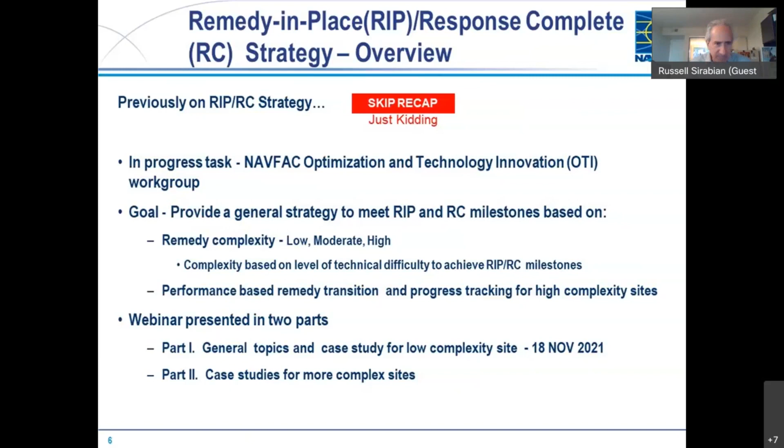So here's an outline of part 1 that was presented last month. So we discussed Navy programmatic goals along with the RIP-RC strategies for low, medium, and high complexity sites. There really was an emphasis on the high complexity sites, as those are the ones that really present the greatest challenge in meeting our metrics.

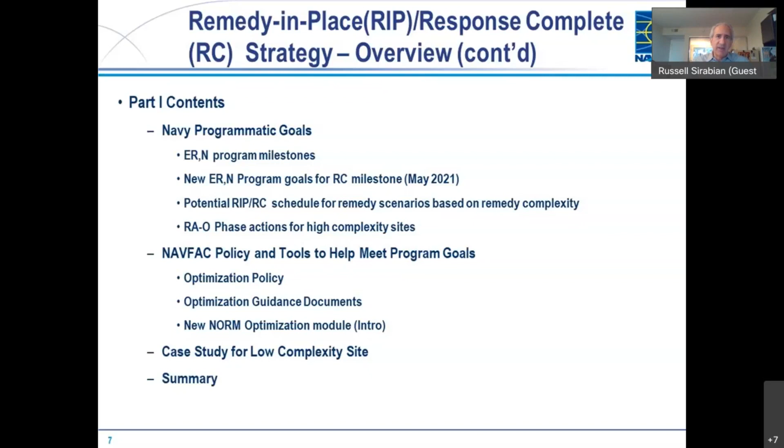We then discussed Navy optimization policy and guidance documents, and introduced the Navy's optimization tracking tool that allows us to better understand the benefits of performing optimization at a programmatic level. Part 1 also included a case study where the RC milestone was achieved for low complexity sites.

Now note that PFAS sites are not included in these goals because there are just so many variables with respect to PFAS sites that just make it impossible to predict where it will be in the next 10 years. So if we exclude the PFAS sites, the Navy has reached the response complete milestone for 86% of the sites, and that's based on the end of fiscal year 21.

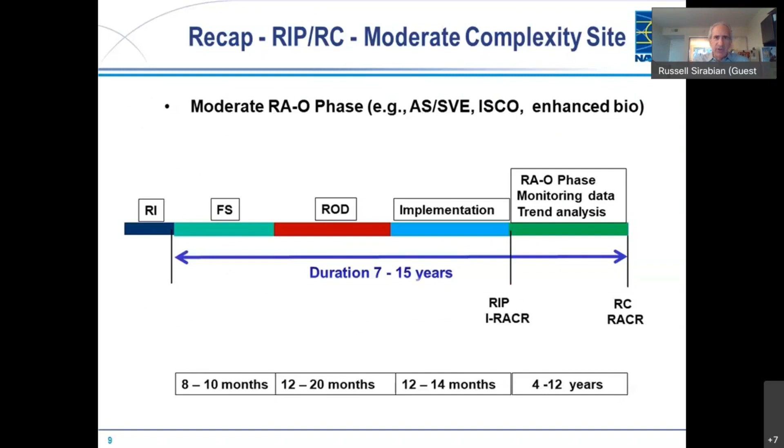So in part one, we presented several figures similar to the one that you see here, showing typical milestones for sites with different levels of complexity. This one is for a moderate complexity site. And note that these timelines on all of these figures are based on the experience of the OTI workgroup members. And they're not meant to be goals or requirements, but really meant to serve as a planning tool.

Now, this timeline is for a high complexity site, and it includes the additional step of the RC transition, where the transition is from an active remedy to a passive remedy. And the RC transition is important for highly complex groundwater sites where it could take decades to reach the cleanup goals. And for these sites, performance criteria can be established for the active remedy, which defines the point at which protectiveness can be maintained with only a passive remedy in place.

So some examples of passive remedies include monitored natural attenuation, natural source zone depletion, or permeable reactive barriers. And achieving response complete transition results in lower cost, as well as having a protective remedy that's sustainable and resilient. So the concept of this RC transition will be illustrated in the following case studies. And with that, I'll turn it over to Pam Chang now to discuss the case study at Camp Pendleton.

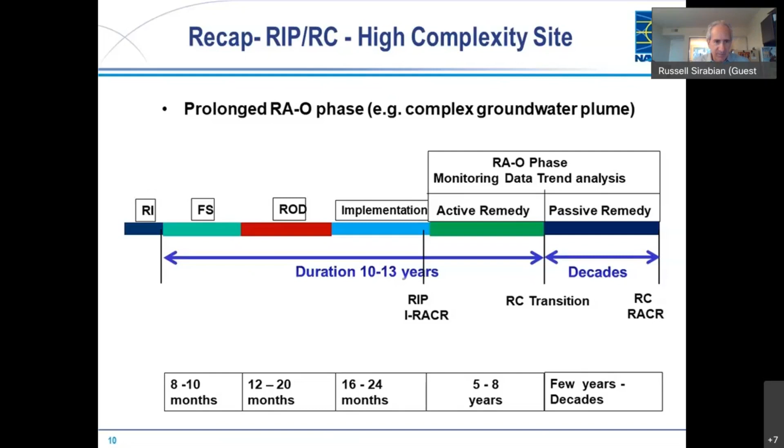Great, thank you, Russ. All right, I'll be talking about a UST site at Marine Corps Base Camp Pendleton. Here's a quick overview of what I'll be talking about. I'll give you a quick site description, talk about the remedial action objectives, the remedy, the construction of the remedy, summary of the remedial action operations, any monitoring data trends we may see, response complete milestones, significant challenges, optimization strategies, and end with current status.

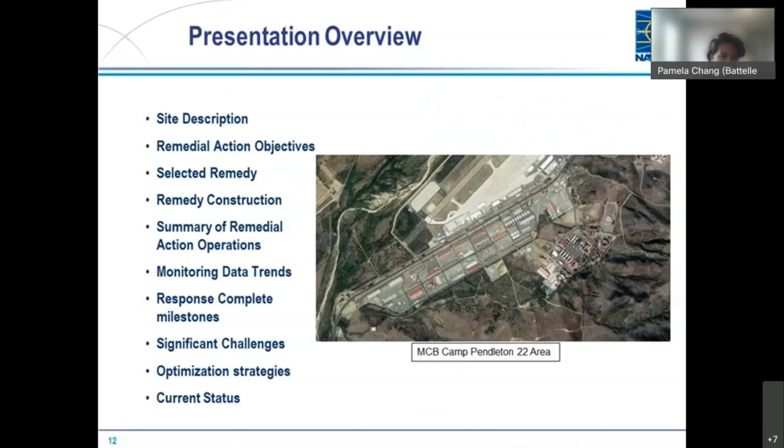All right, so Marine Corps Base Camp Pendleton is located in San Diego, California. It is bordered on the west by the Pacific Ocean and occupies 125,000 acres of land. And any given day, there's over 60,000 people on the base. And with that many people, there tends to be a lot of vehicles, and vehicles need refueling. And Camp Pendleton has 5 gasoline stations on the base. We're going to be talking about the 22 area gas station site. And the 22 area gas station area is very, very busy. It has multiple uses. It has a lot of industrial activity that supports the various activities on the installation.

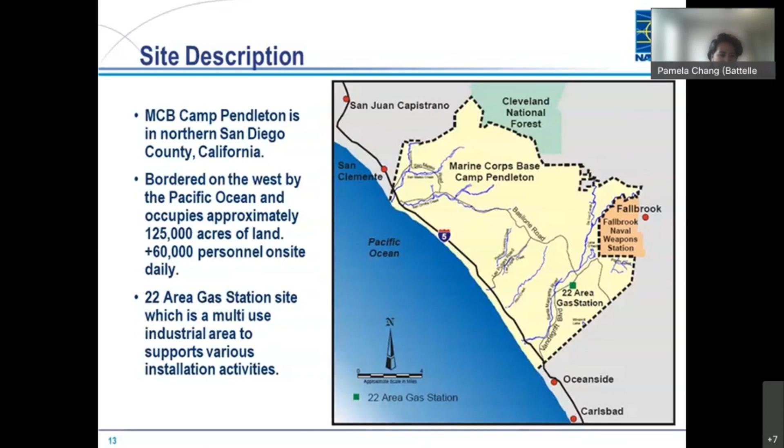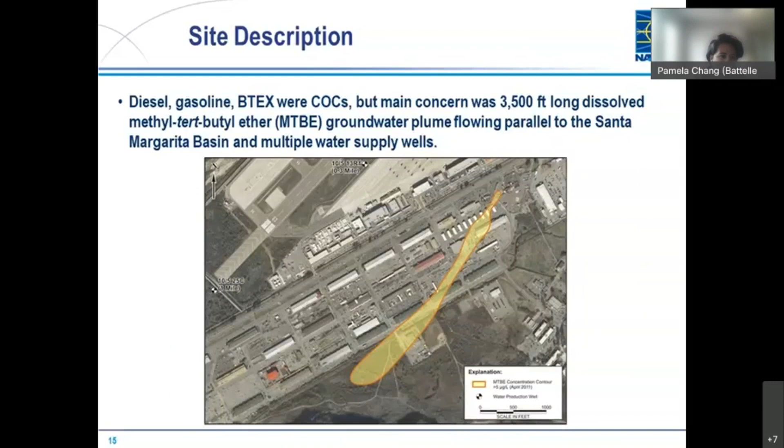So the main contaminants of concern were diesel, gasoline, and BTEX. But by the time the CAP was written in 2001, the main concern really pivoted to the MTBE that was in the groundwater. It was a 3,500 foot long plume. It paralleled the Santa Margarita Basin, which had many water supply wells to the north. The RAOs were developed based on the State Water Resources Control Board using their MCLs for drinking water. Here are the MCLs for BTEX, and as you can see, for MTBE, 5 micrograms per liter can be pretty challenging to meet as a project action level.

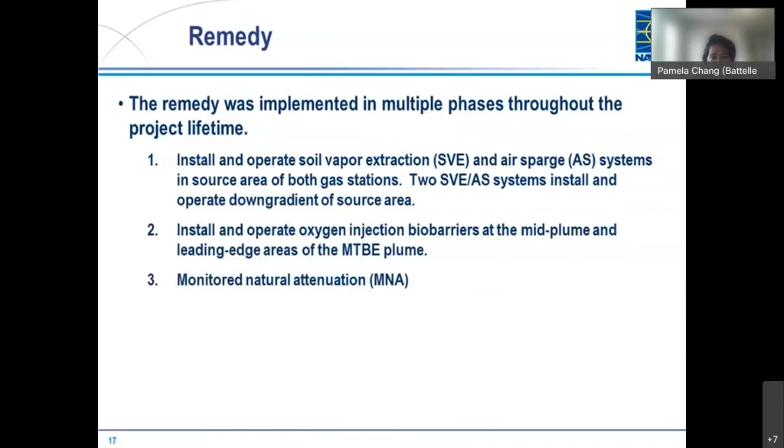The remedy was implemented in multiple phases. It first started off with interim remedial action, which was the soil vapor extraction and air sparge systems for both gas stations in the source area. And then there were 2 systems installed downgradient of the gas station. So those are 4 systems total. And then those were transitioned over to oxygen injection biobarriers at the mid-plume and leading edge areas, followed by monitored natural attenuation.

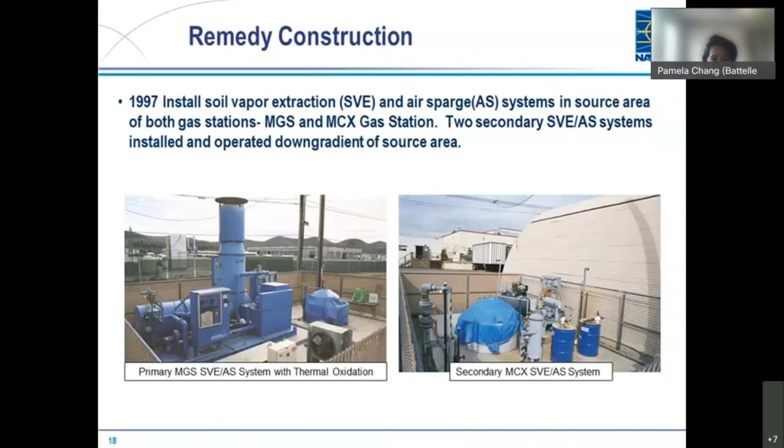The Water Board did concur with discontinuing the active remediation and transition to MNA. And for about 15 years, the Navy collected groundwater samples with TPH diesel and BTEX concentrations reducing to less than reporting limits. And for that reason, the Navy started engaging with the agencies to get no further action. But there was a little bit of a hiccup in the sense that there was some soil contamination in the source area that was known.

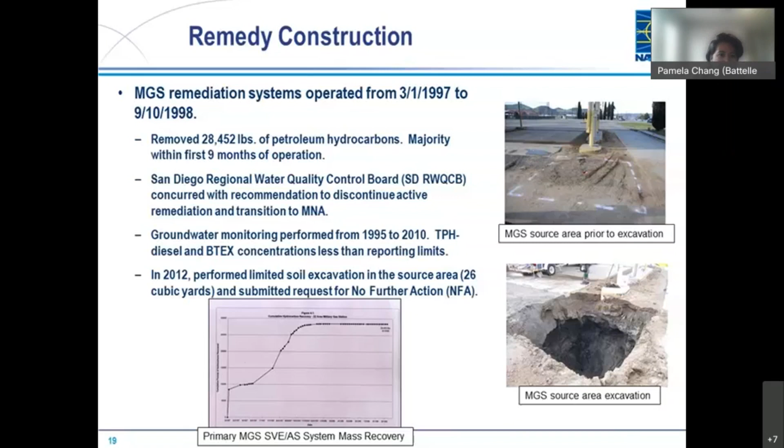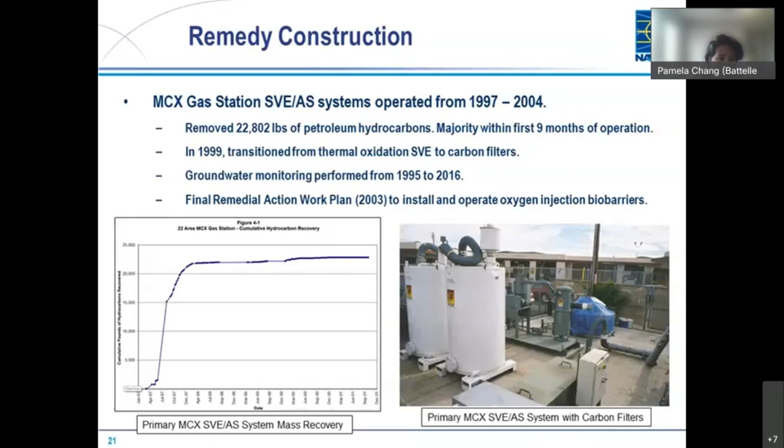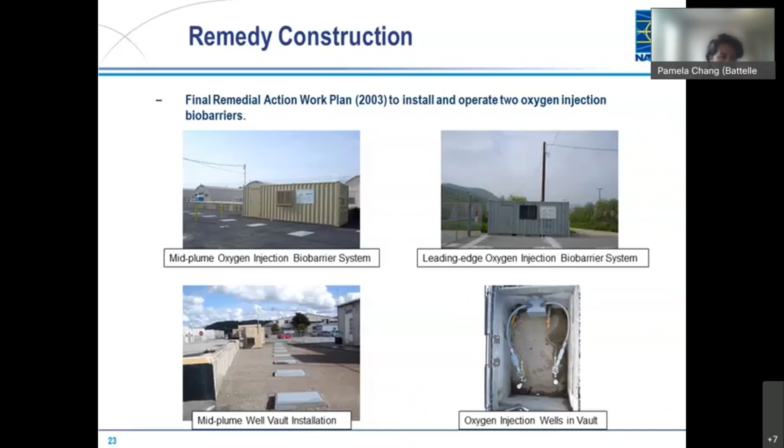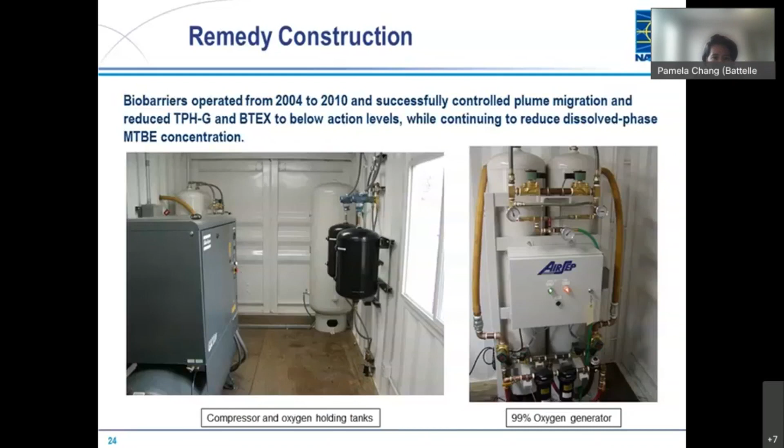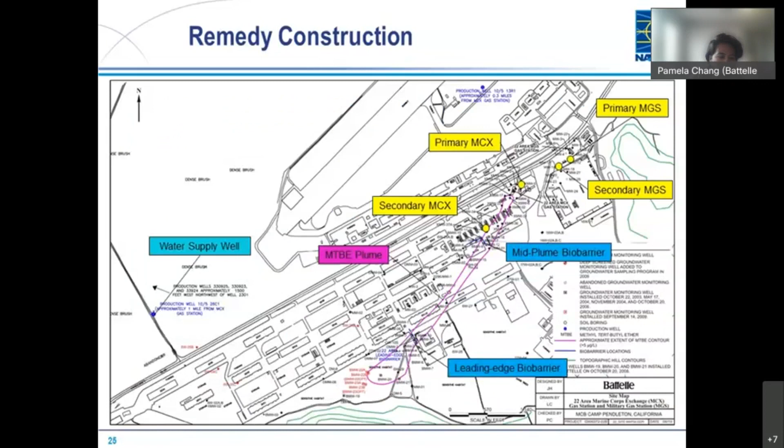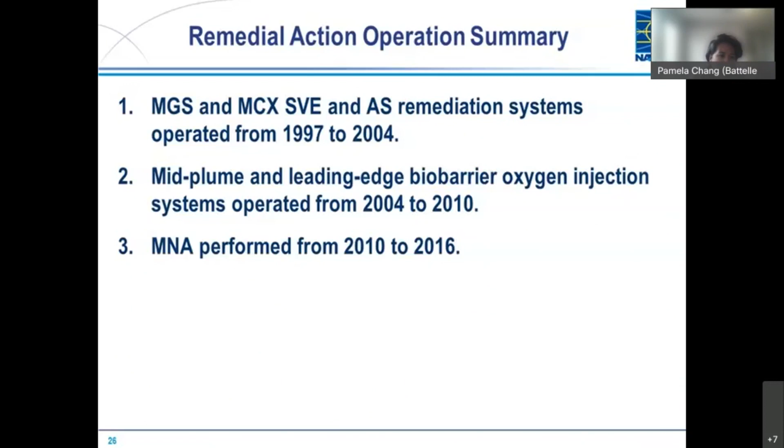Significant challenges. So with, I think, many sites, negotiating the cleanup levels with the regulatory agency is always very challenging. This was made more difficult with regulator personnel changes. I could count about 7 changes that I experienced. And starting in 2012, the Water Board started implementing a low threat UST case closure policy. It was actually a really great policy because it made a consistent method of determining if a site is eligible for closure. However, our MTBE plume did not meet that criteria. So for that reason, the Navy had to find additional lines of evidence to negotiate closure.

Another significant challenge, hotspots. I think this is common as well for most sites. For the MGS, I showed you the excavation that occurred because of the soil hotspot. For the MCX, we had a hotspot of groundwater for MTBE. And so for a couple years, we brought in a portable sparge system, connected it to 3 wells, sparged for 2 years, and were successful in reducing that hotspot from 820 to 18 micrograms per liter.

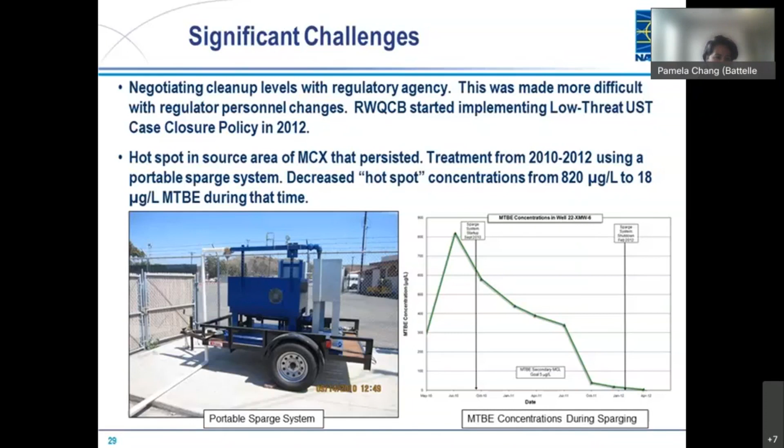Remedy optimization strategies. So the main one was in 2007, the Navy performed a third-party optimization, and the recommendations that came out of it were increasing the leading edge oxygen injection barrier system cycling, so just putting more oxygen in the ground, and shutting down the mid-plume oxygen injection biobarrier system. Around that area, the concentrations had decreased to almost action levels. And so it made sense to try and shut down the system, and that was achieved in 2010.

Optimize the groundwater monitoring program, which was essentially reducing the number and frequency of groundwater wells sampled using regression trend analysis and decision tree diagrams, and then updating the conceptual site model. The regulatory agency indicated there were some data gaps, and so we used cone penetrometer testing to identify those data gaps.

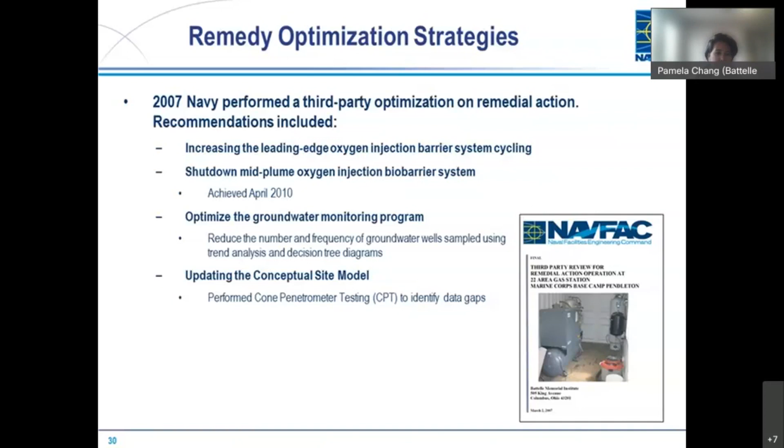So I'll talk a little bit more about the additional lines of evidence used to achieve response complete. I mentioned that the mid-plume was shut down, and a lot of that had to do with doing a sustainability analysis using SiteWise, which is a Navy Excel program available on the website. Essentially it tries to quantify the energy requirements of the system or the site and determine the environmental impact of that site. In this metric, we're going to use the carbon footprint, CO2. The end result being running the mid-plume biobarrier for 1 year is equivalent to driving 16 SUVs all year. The agencies were very receptive to this, and for that reason, agreed to shutting down the system.

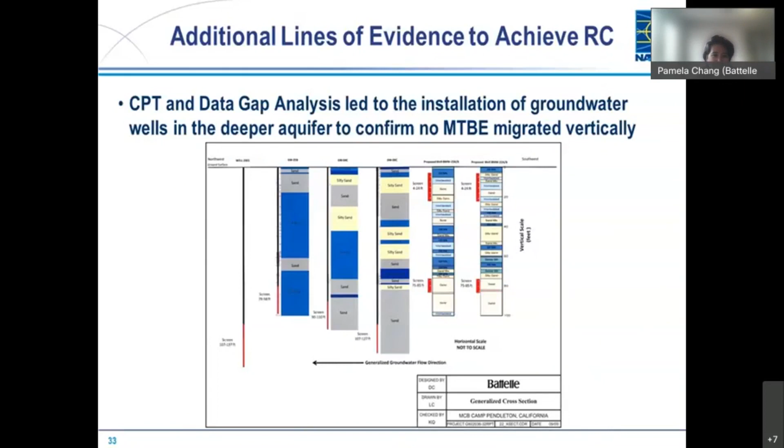Another thing we did was the cone penetrometer testing I mentioned. It's a data gap analysis tool that we used to eventually install groundwater wells in the deeper aquifer. We sampled those wells to confirm that no MTBE was down there and that none had migrated vertically. This was a great concern for the agencies, and we were able to complete that data gap. Another thing we do, which I think agencies often ask, is a correlation between the MTBE and groundwater elevation. We did that with statistical analysis, and the end result was that we did not find a correlation between groundwater elevation and MTBE. That was very encouraging and helpful towards achieving response complete.

And then lastly, we did a capture zone analysis using MODFLOW, a commonly used groundwater modeling tool in our industry. We did a 20-year backward particle tracking analysis using various pumping scenarios, like the current pumping rates and increased pumping rates, even to the point where we're drawing down the aquifer, to see if the MTBE would be pulled into the production well that supplies all 60,000 people on base. The end result was there actually was not a draw of the MTBE into the capture zone of the production wells. I think that was probably one of the key linchpins in achieving response complete for this site.

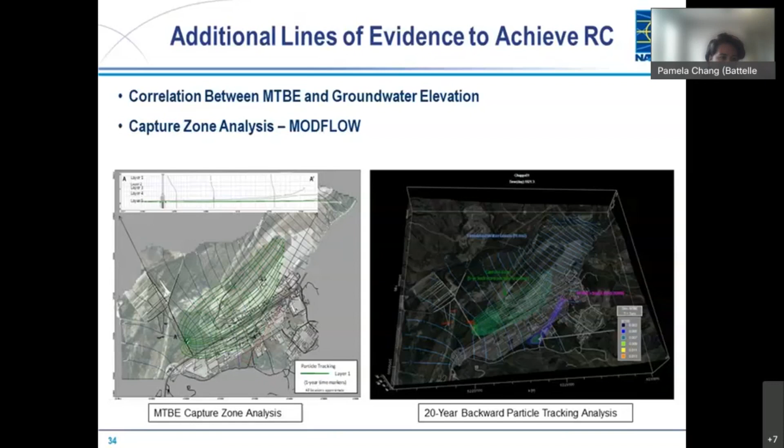So the current status, the Navy achieved the ultimate goal of returning this area to Marine Corps Base Camp Pendleton so they can complete their mission critical activities. And we achieved no further action. However, the Water Board did note that if there are any future land use changes, they may require reevaluation. That simply means that if there's any land use changes or construction being performed on site and they encounter contamination, the environmental security people of Camp Pendleton would notify the Water Board to determine if the site needs to be evaluated. And that is my last slide.

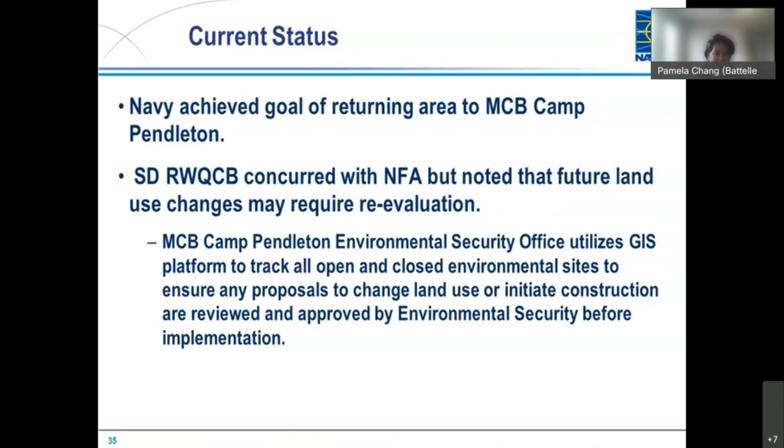All right, so I will turn this over to Mike Singletary to talk about his case study. All right, thanks, Pam. So for the second case study, I'm going to talk about a site at former McGregor, specifically Area M, and the path, including a lot of optimization work, that this site has been on to achieve response complete.

So McGregor was a large facility, roughly 9,700 acres, located in a fairly rural part of Texas. It was a government-owned, contractor-operated facility that was used to manufacture bomb and rocket motors. As part of that process, whenever they would clean those rocket motors out, they would use a hog-out type operation that involved a lot of water and chlorinated solvents to clean these motors. So a tremendous amount of perchlorate was released at not only this site, but a number of sites across the facility. So there are a lot of very large perchlorate plumes at McGregor.

This site was transferred to the city of McGregor in the 90s, and a large part of the property has been redeveloped. They have a number of different industrial and agricultural leases that use the property for a variety of reasons. SpaceX actually has a testing facility out at this property.

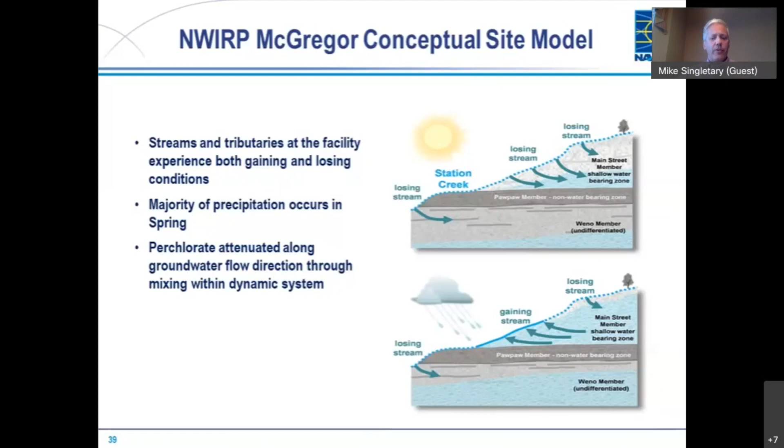And so this was a real key aspect of the site, and we were able to do basically a mixing study of the site and present this to our regulatory agencies as a way of trying to better understand the site conceptual model.

So going back to the original containment remedy that I talked about, this started back in the late 90s as some initial, smaller scale pilot studies, and this system was put in full scale within a 2 to 3 year time period. But again, it relied on creating these large trenches that were used to collect contaminated groundwater. And all that water was routed above ground to a fluidized bed reactor that was used to treat the perchlorate through a biological reduction process.

That water was typically stored on site in those lagoons, and then eventually it was discharged into the tributary that ran along the eastern side of our plume, and we had to meet certain NPDES type requirements for discharge. Along with that, we did some significant treatment of the contaminated soils, which was thought to be one of the primary sources. And so that soil was excavated and treated through land farming and then placed back onto the property. And that was done in the early part of the 2000s.

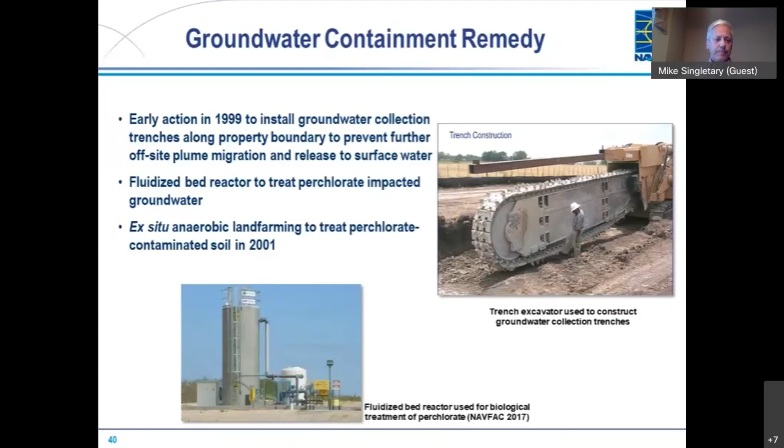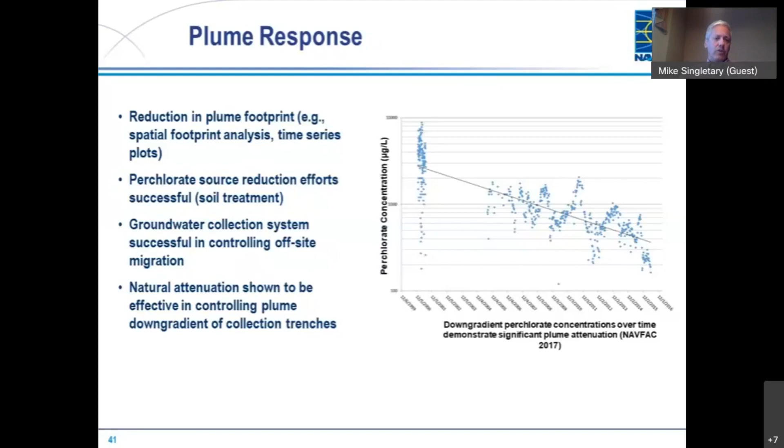And so this was one of the first key things to look at when we were thinking about transitioning: what the concentrations were in the plume over time. These samples are collected at the very down gradient part of the plume, so it gives you a good idea of the overall contaminant flux over time, what's going into the pump and treat system. And I think it reflects a lot in terms of source reduction, removing a lot of that contaminated soil, and then just that long-term flushing action that I mentioned before.

So a little bit about some of the plume management strategies that have been employed for this site. The first goal was really to contain the plume, to try to prevent any further migration, and we did that through the hydraulic containment system that I mentioned. The second key aspect was establishing this plume management zone. Within the Texas Risk Reduction Program, or TRRP, they allow for the establishment of these plume management zones. Within the PMZ, it's not necessarily that you're expected to meet the cleanup criteria, but that you control exposure. So through land use controls, monitoring, and other measures, we're able to prevent use of that water for unintended purposes like drinking water.

So we had a PMZ that included both on-site as well as off-site portions of the property. We were able to work with Texas A&M University, who owns the property just south of McGregor, to establish that PMZ. And then finally, being able to reclassify the groundwater, and this applies primarily to the on-site portion of the plume, based on the low specific yield. We tested the actual specific yield of the aquifer itself, and it was low enough for us to make that justification.

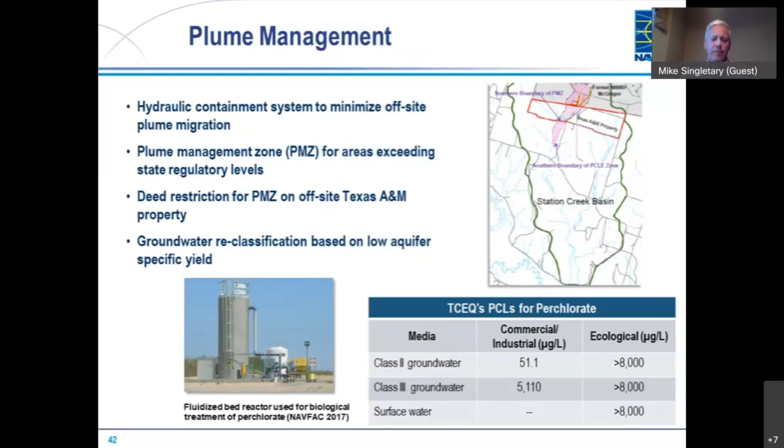And in doing so, we were able to increase the PCL, or the cleanup criteria, not only for perchlorate, but for all of the contaminants by 2 orders of magnitude. So for perchlorate, this goes from roughly 50 parts per billion up to 5,100 parts per billion. We think this makes sense in this particular setting because we're in a very rural area and we can control exposure to the groundwater. So this is a really good option for this particular site. And then finally, I mentioned the ecological study that we had done, and that study showed that up to 8,000 parts per billion, no adverse effects were observed for the sensitive receptor, that being an amphibian in this particular case.

And so, getting to where we're going with this particular site, it appears that the pump and treat system has reached that point of diminishing returns. We could run that system for the next 30 years, continue to treat lower level perchlorate in groundwater, but we wanted to evaluate other options because it appears, based on the conceptual model, that the down gradient contamination has decreased to below concentrations of concern. Could we shut the pump and treat system off permanently and really focus the remaining treatment further up gradient, where there's a residual source of around 10,000 parts per billion that is still within the groundwater?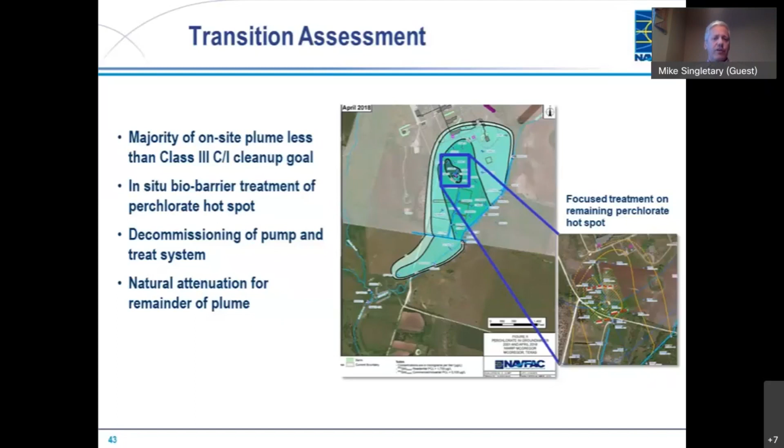And so we did a pilot study back in 2016, 2017, looking at installing a biobarrier treatment system within this zone, based on the fact that biobarriers had been very successful at a lot of other sites. The idea would be, if this proves successful, we would decommission the pump and treat system and rely on that long-term bioactive zone that we maintain within the source area, and then natural attenuation and that flushing mechanism that I talked about for the remainder of the plume.

So we did a pilot study of this process back in 2016, 2017. We basically installed 2 rows of bioinjection wells across the plume, and we monitored both up gradient and down gradient. You can see in these graphs, in the down gradient well, once we injected emulsified oil into those injection wells and created this reducing zone, the perchlorate went down significantly, to less than 10 parts per billion, as well as some nitrate. There's a lot of nitrate in the groundwater as well, due to agricultural activities in this part of the state. But both those constituents were able to be reduced fairly easily. In fact, you can see from the plot, we even generated methane. So we achieved more than we needed to in terms of reducing power.

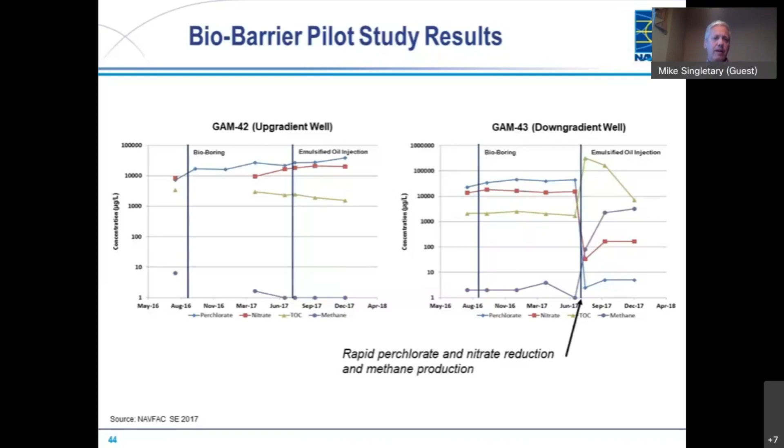And so during the full scale, we'll sort of have to play with the dosing and the reducing equivalents. But again, perchlorate's a fairly easy compound to degrade. And so we were successful in creating a reactive zone. And so the plan now is to scale that up to basically treat that entire remaining 10,000 ppb hotspot that I showed in one of the previous figures.

So just to summarize here for the McGregor case study, again, we've relied on this life cycle optimization approach for managing this site and really to try putting us on that path to eventually achieve response complete. And there were a number of different approaches and different things that we used to do that. I won't go through them in detail. It's what we've talked about, everything from the groundwater reclassification that allowed for a more reasonable cleanup criteria, to the site-specific ecological risk assessment that we did to look at any residual risk that would be present downgradient where that surface water still has some trace levels of perchlorate.

The plume management zone is going to be a very important tool for us moving forward because, again, we'll manage this site through the use of land use controls until we reach the ultimate objective, which again may take many decades for this particular site. And then finally, transitioning this site from active pump and treat, which is an extremely expensive and labor-intensive process, to something that's passive was another key milestone for us.

And so again, by doing this transition, this will result in significant cost avoidance. At one point in time, we were spending more than $1 million to maintain, to operate this system and do all of the monitoring. That's been cut down over the years through optimization. But by transitioning this away from pump and treat, we're basically going to achieve about $16 million in cost avoidance. And again, moving forward, it'll be mainly just replenishing that biobarrier on an as-needed basis, and then MNA monitoring.

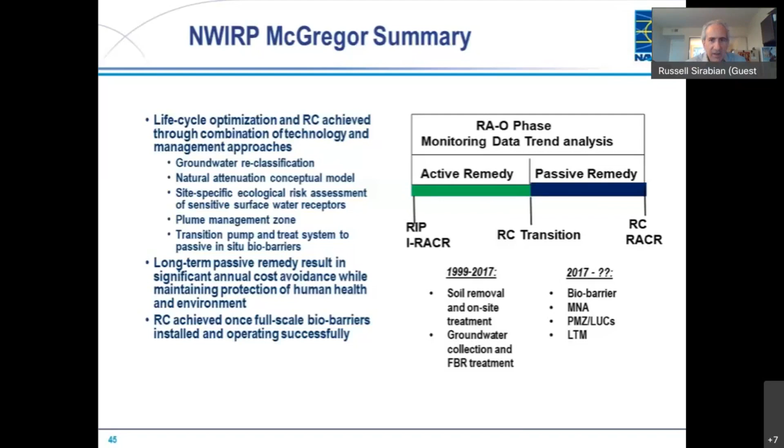Okay, well, thank you, Mike. To the next slide here. Okay, so before taking questions, I'd just like to summarize the two-part webinar. So in part one, we provided some programmatic information, including the Navy's new response complete metrics and a tracking tool used to monitor the benefits of optimization. We also discussed the Navy's optimization policy and the various guidance documents and other technical resources developed by NAVFAC that are available to the public and to be used by RPMs and contractors to help achieve response complete or response complete transition. In both parts, we presented case studies of sites where a strategy was implemented to help achieve the RC goals. And some of the lessons learned from these case studies are summarized here on these slides.

One of the lessons learned was that even a site that's considered low complexity, and this was presented in part one, can have significant challenges to achieving RC. So applying optimization concepts is really beneficial for all sites. Some of the benefits of optimization during the remedial action operation phase included reducing the O&M cost and reducing the monitoring cost, and also improving the effectiveness of the remedy to help expedite the cleanup to reach a point where we either met the cleanup goals or interim goals that allowed for transition to a passive remedy.

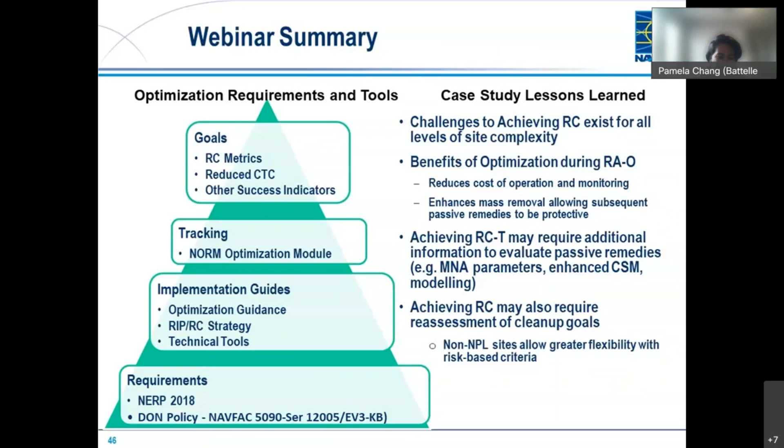Do you think the Water Board would have been as flexible if contamination at Camp Pendleton was a chlorinated ethene site? Yes. There's actually chlorinated solvents in the 22 area, and to my knowledge, that site is still open. And because it's chlorinated, those are DNAPL; it dives and goes into the deeper aquifer, where the MTBE hovered and stayed in the shallow area of the aquifer. And so that poses a greater risk that the agencies, I believe, are keeping more tabs on.

All right, thank you. And the next question is for Mike. Did the Navy have to compensate Texas A&M to implement the off-site deed restriction? I don't know. I'd have to go back and check specifically. I do know that we do have leases for all those properties that allow us to go in and do sampling and any kind of activities associated with our remedial actions. And there is a nominal fee associated with that, just to acknowledge that we're going onto their property. But I'd have to go and check on the deed notice. I don't know if we had to compensate them or not. I don't think so, but I can double check on that and get you an answer.

All right, thank you. Our next question could really be addressed by any of our speakers, I think. This approach focuses on those sites that already have an active remedy. Are there sites where you started with passive remedies and are evaluating going to active remediation?

Yeah, I guess I could think of a scenario where maybe you had natural attenuation as the selected remedy, either standalone or part of a treatment train, and maybe it wasn't working to the level that you thought it was or was in the decision document. That might prompt more active treatment, like if it was a contingency remedy in a ROD or something. I don't have any good examples of that where you've had to go back to active treatment, but I could see how that could potentially come into play if you're not meeting whatever performance goal was established. That could happen. I guess that would go back to what goals you set in the first place and making sure that those are realistic, and revisiting them if you need to, based on changes in risk assessment, land use, that kind of thing.